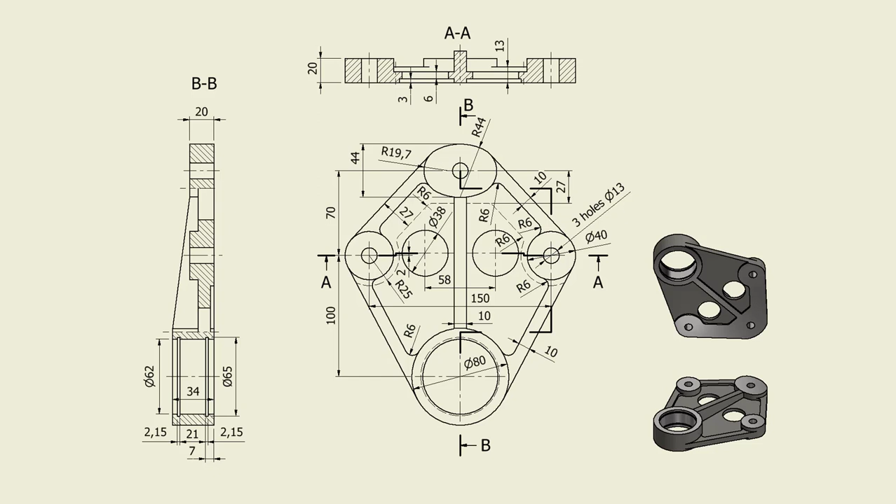Hi my friends, let's model the part number 67 from my collection of 100 parts.

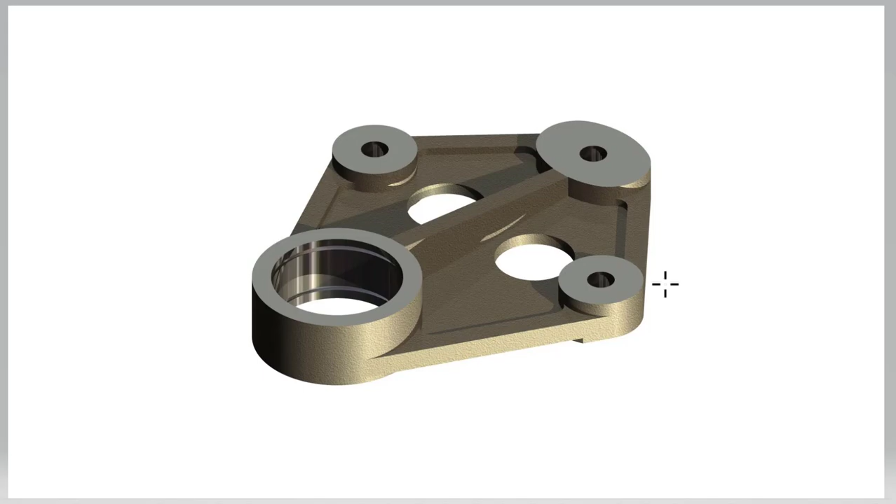The picture of this part is here. As you can see, there are three circular bosses and one oval. Yes, always we have to take care with ovals. In the drawing we see dimensions and how the part looks from top and from bottom.

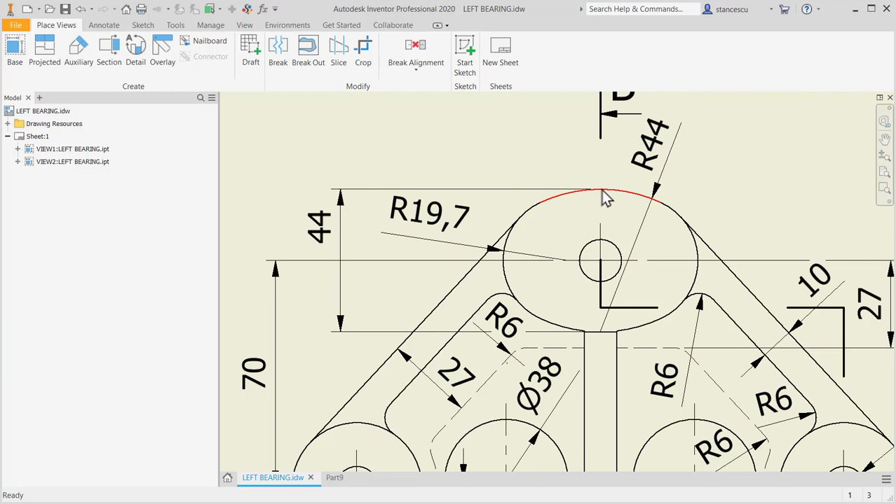About this oval, as you can see, radius is 44 on both parts and the distance is 44. What does this mean? It means that the center of one arc is on the opposite arc. There is no mention about the distance in the other direction. So we have to create these two arcs and then place the tangent circle with this radius. The other dimensions are here.

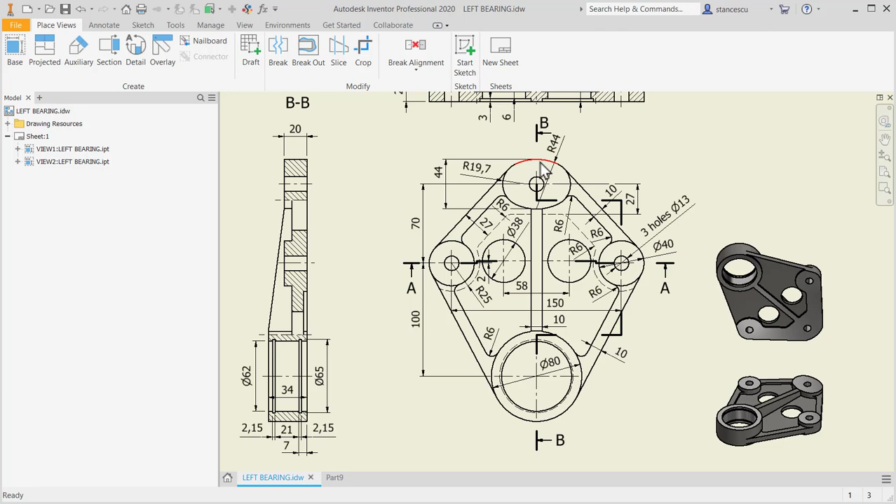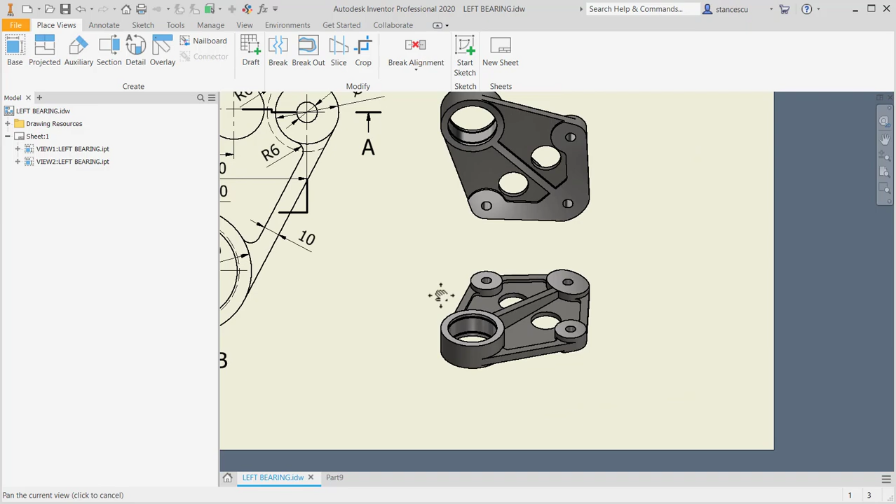We start with diameter of 80, two circles of 40 at a distance of 150, and then the oval. Yes, we start from this position. The start plane is this, and we extrude on 6. This is 6. And there is another extrusion on the back and another on the top. Let's start. Remember dimensions.

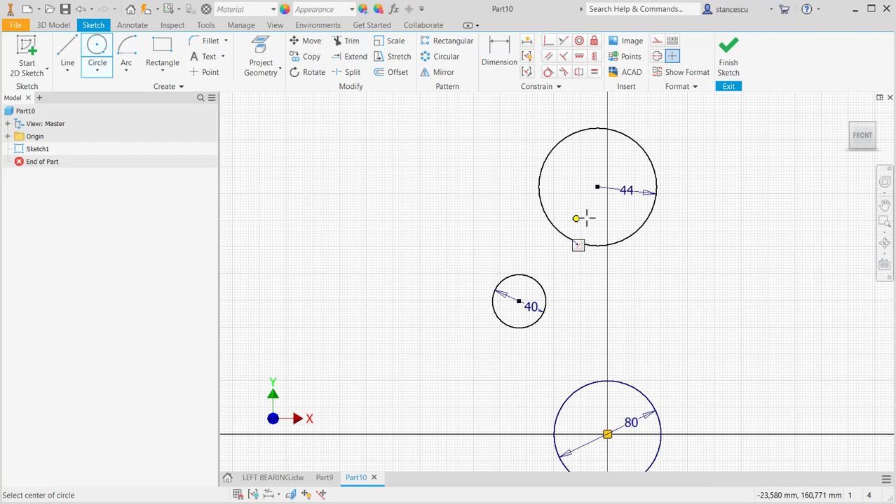We draw a circle with diameter of 80 and then another one of 40, and the oval. The oval is with the radius of 44, and another circle is placed here with the same radius. So I'll make it equal with this one. Okay, they have the centers on the same vertical, and both on the same vertical with the center point. Okay, good.

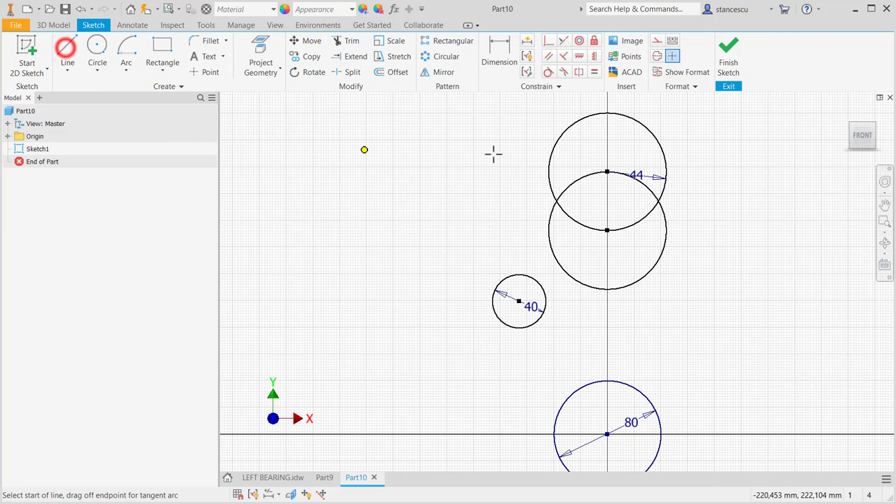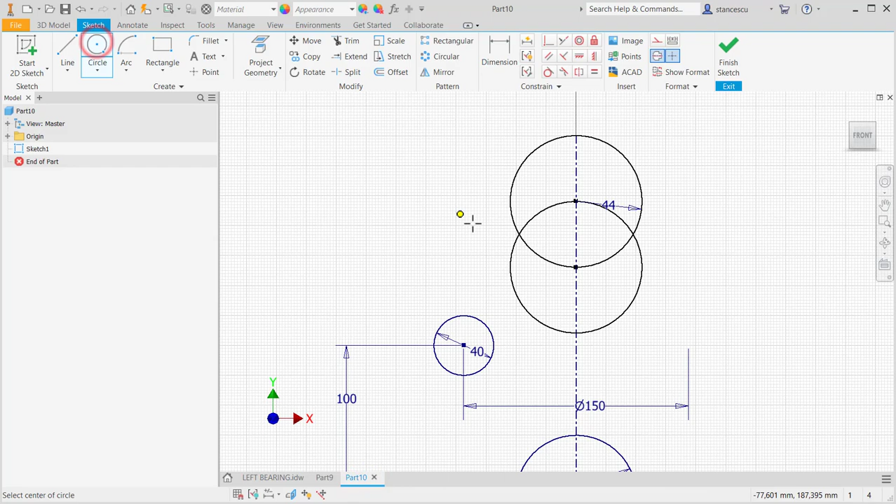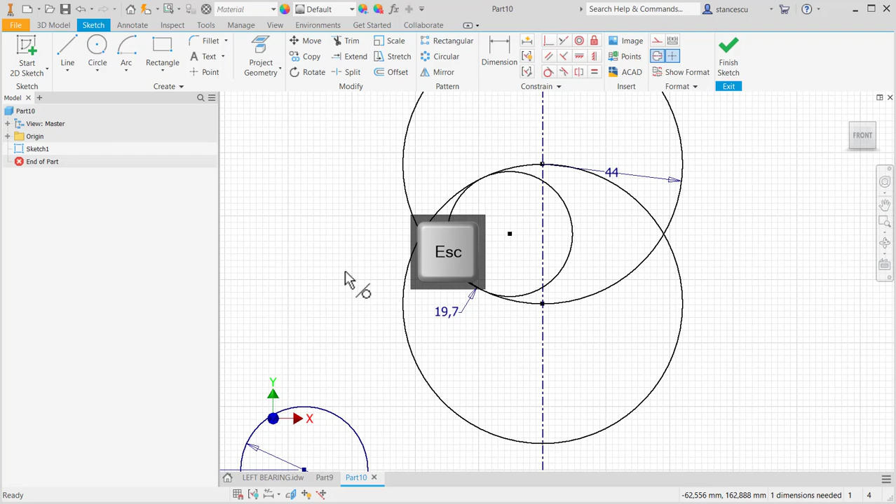The other arc of the oval is with radius 19.7 and it is tangent to those circles. I create a circle with a radius of 19.7 and I apply tangent to both circles. Good. Parts of the oval are here. Place this dimension of 70. You see, fully constrained.

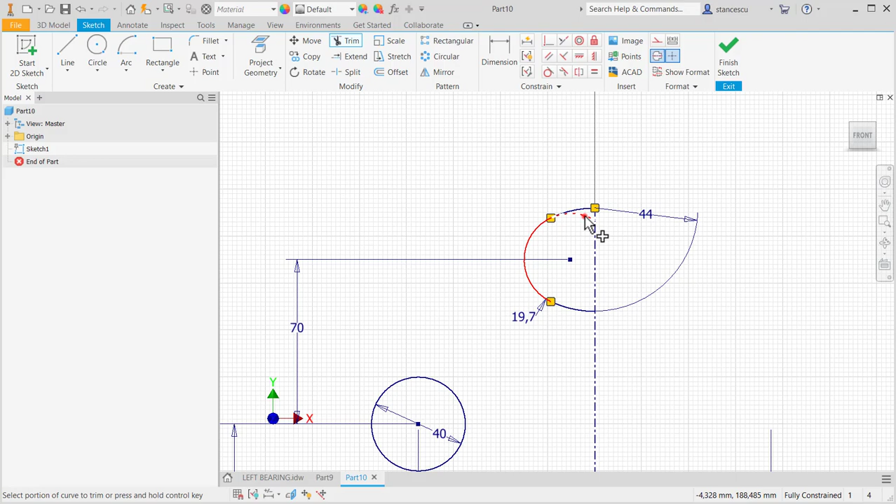And I apply trim, look at me, to all the entities to the right of the center line, and also here. Nothing is lost, fully constrained is maintained, and now I try to eliminate some other not useful ends, looking to stay fully constrained. Okay. Good. And this one, and this one, and it is fully constrained.

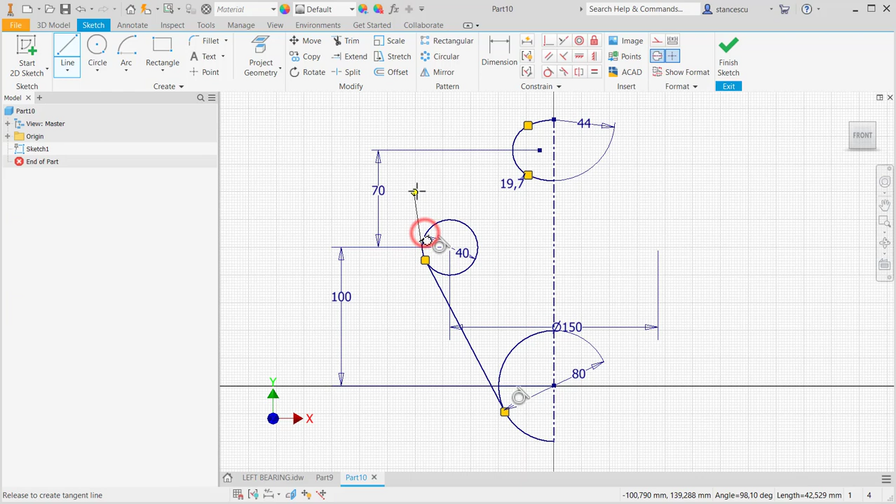Good. Now I draw tangents. Keep pressed the mouse button and find the tangent. Keep pressed and find the tangent. Okay, let me see which curve has this tangent. You see, this is the curve with the tangency. The other tangency is between these two. So the radius 19.7 is with tangency. Good.

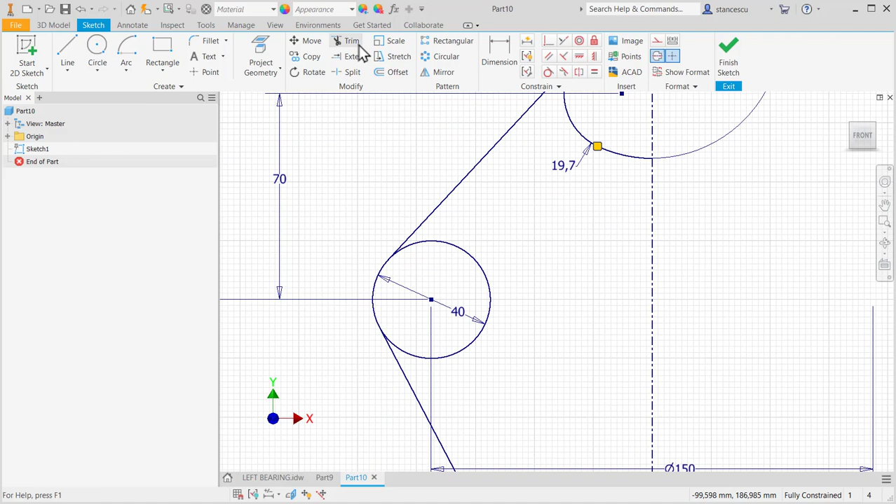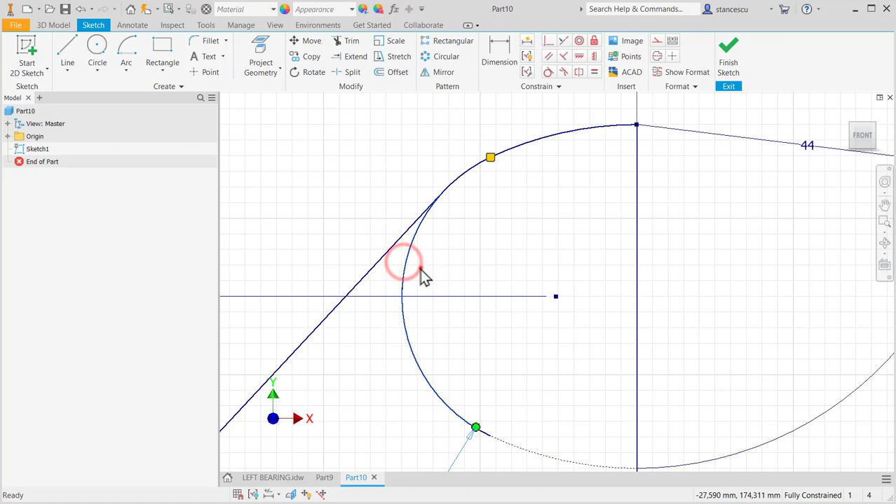Trim to this, trim here, and make this not center line. Everything is conserved. Now I make this construction, and here I need to split. Fully constrained is still here. Why? To make this also construction. Okay, now I have half of the part. Finish sketch.

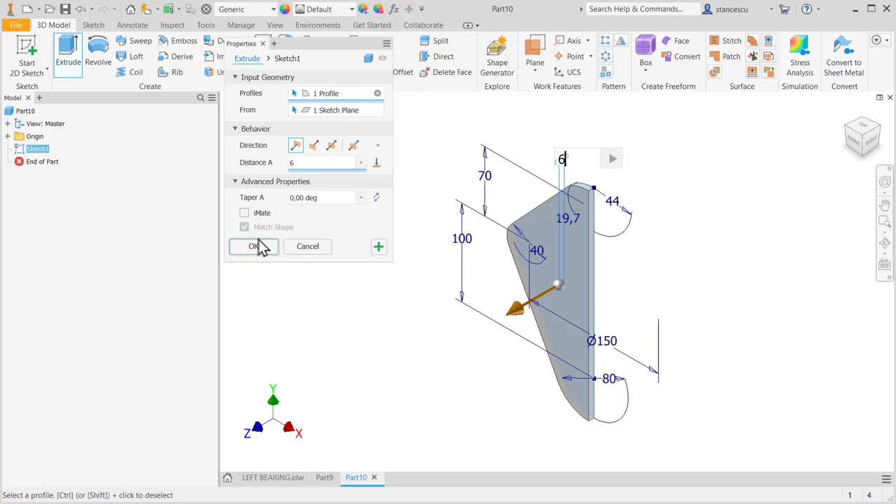F6, extrude on 6, as I said. Okay, then mirror about this plane to have the full plate. This is the plate.

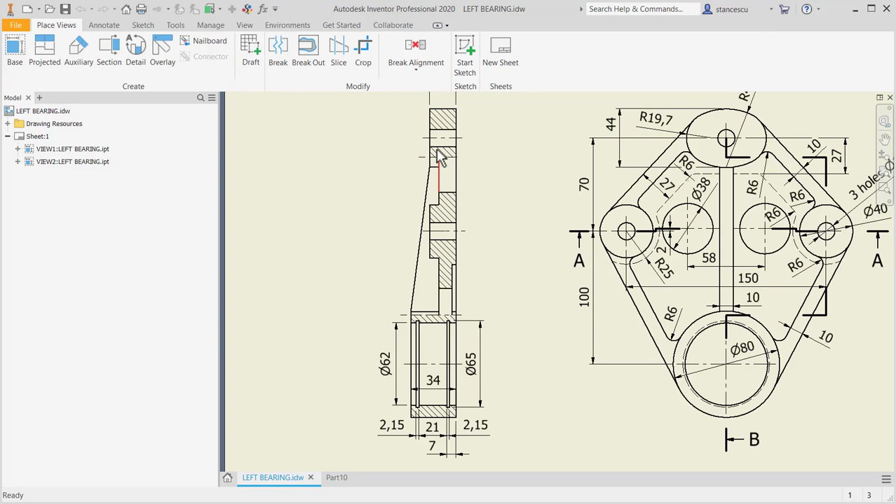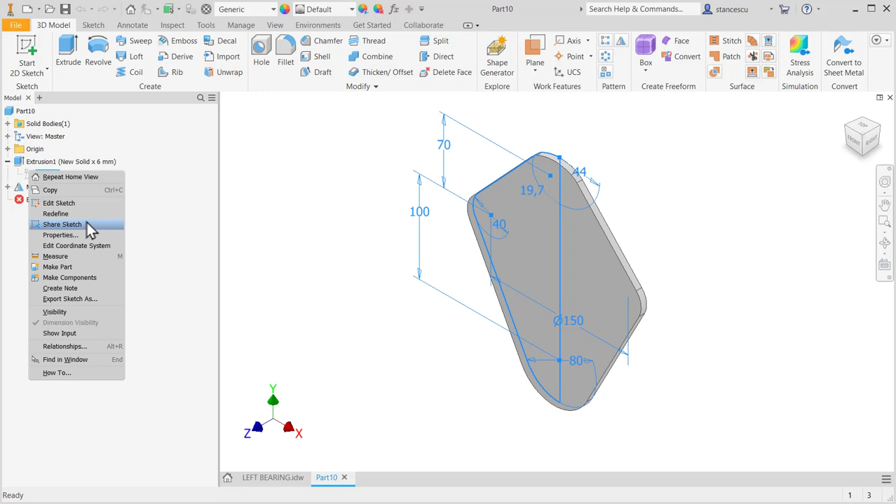Now let's take a look at the drawing. You see, there is the same level of 20 for these 3. Which ones? 1, 2, 3. And the other one is of 34. So I create these 3 bosses. It is not very difficult, but I need to have the sketch present. Sketch, share. Good.

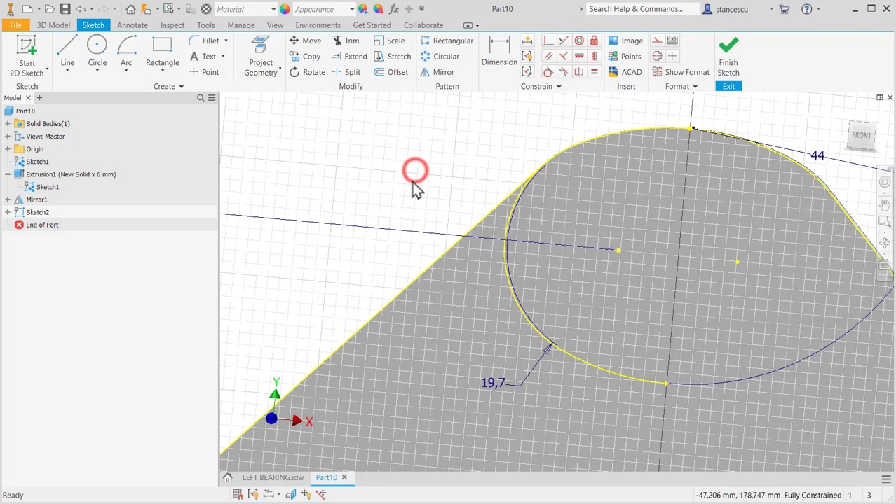I create a sketch on this face, and then I project this entity and the other one, all of them. Okay. I make these normal lines, and I extend with my hands these arcs.

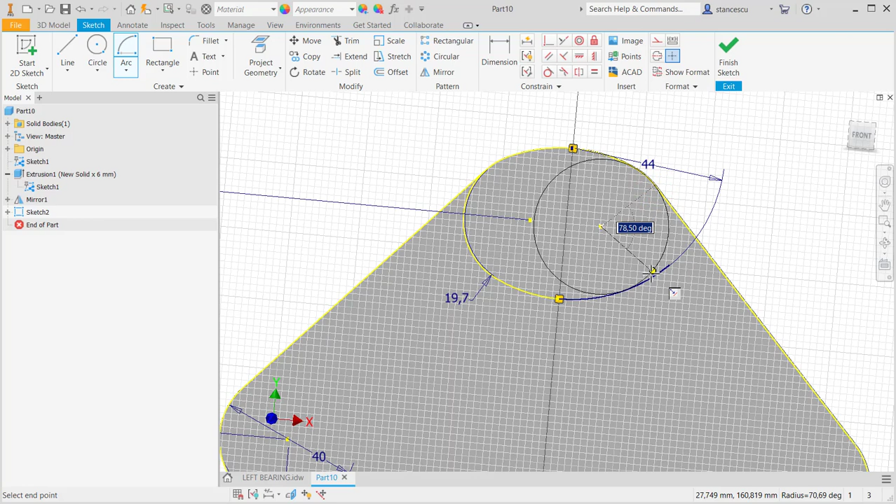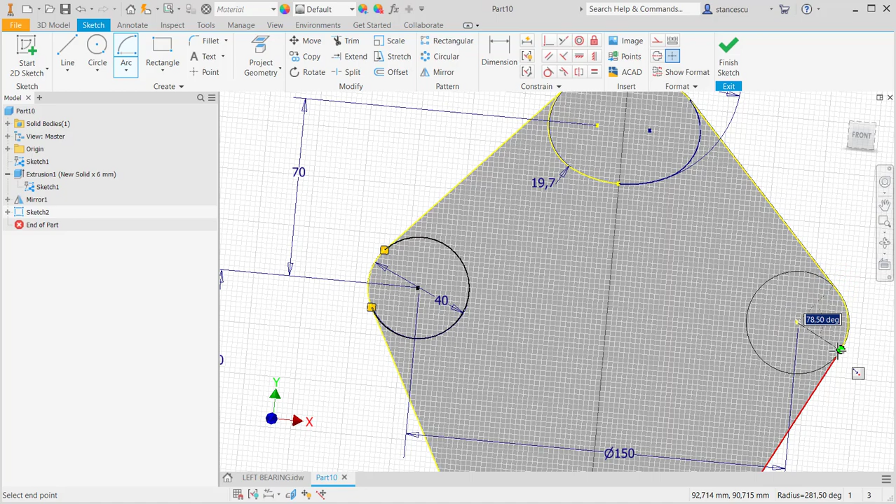Because I want to obtain the extend to here and trim this. I want to obtain that oval, to create the boss arc, this center from this point to this point, the other arc and the last one, but this is not to be extruded. Yes, good.

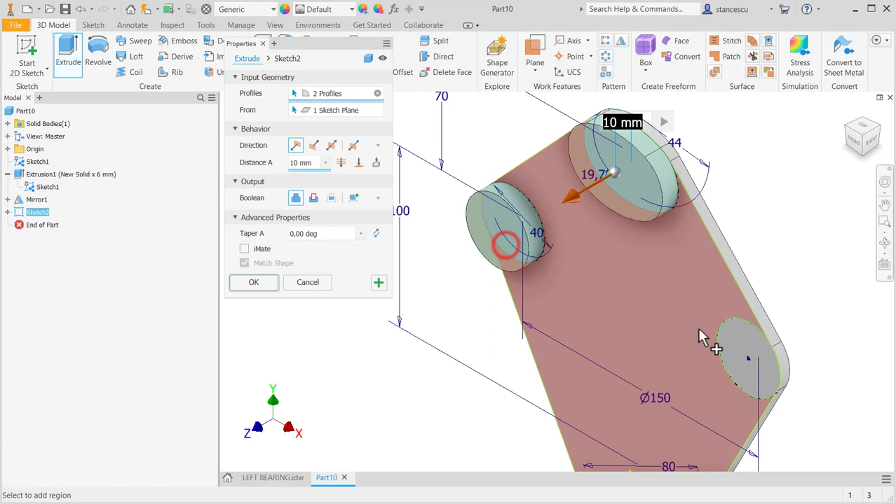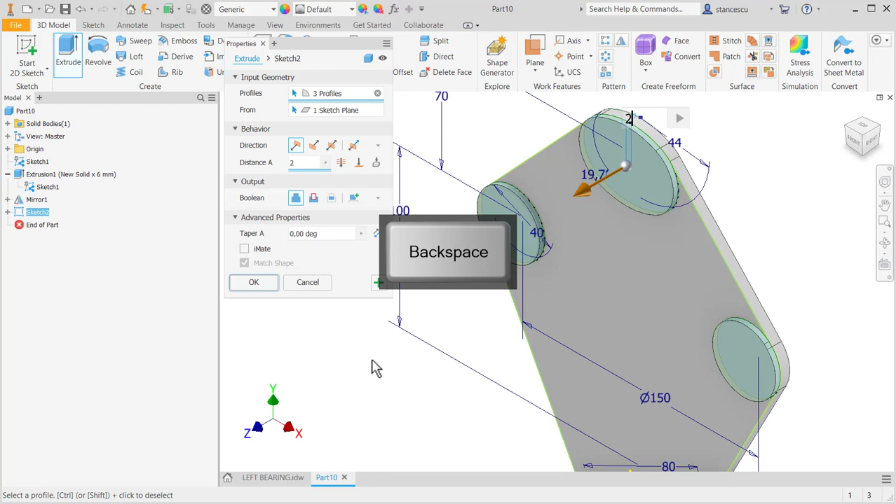Extrude this, this and this. What is the thickness? The thickness is 20 minus 6. I told you that this is the base plane. 20 minus 6. Okay. Now I create the other boss, which will have a large hole inside.

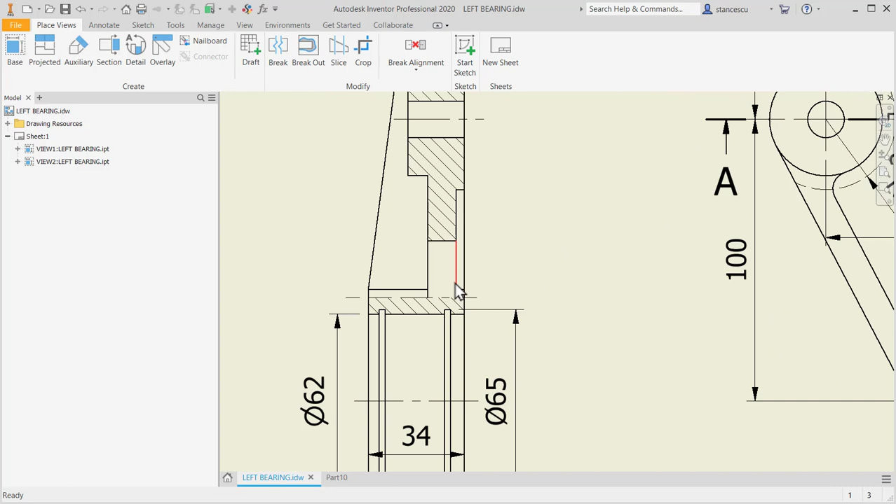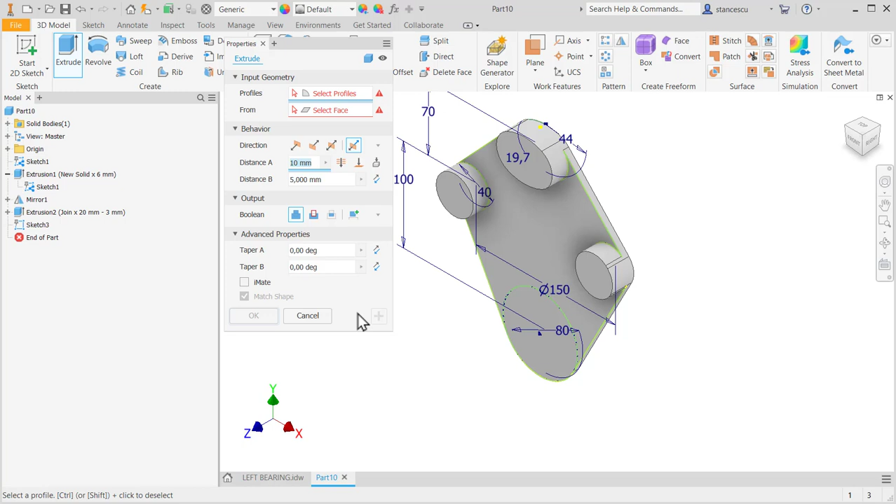Finish sketch. What is the thickness? 34 minus 3. But I can extend it with 34 minus 3 to the left and 3 to the right. Yes, let's do it. Extrude. Asymmetrical. Of this contour, which is to both parts, measured from here.

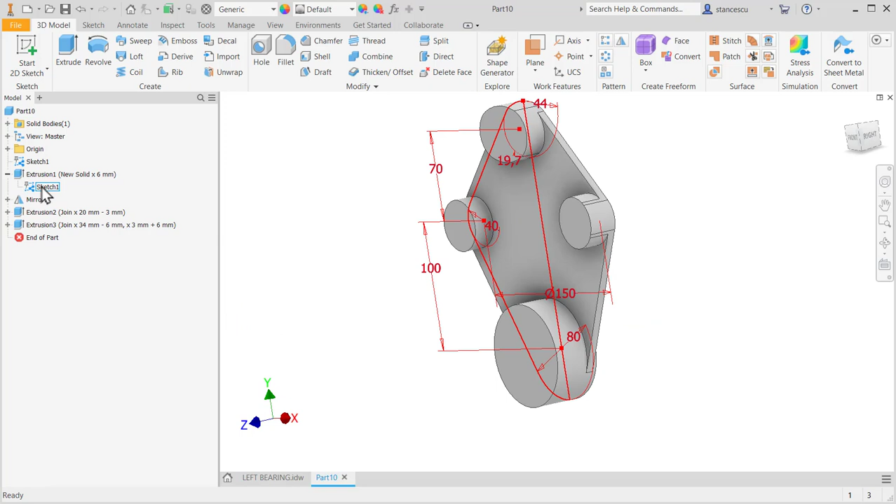Yes, so this is 6, don't forget. This one is 34 minus 6, and the other one is 3 plus 6. Okay, let's make this not visible first, and then let's measure. I press M, from measure, and I measure this distance, 37.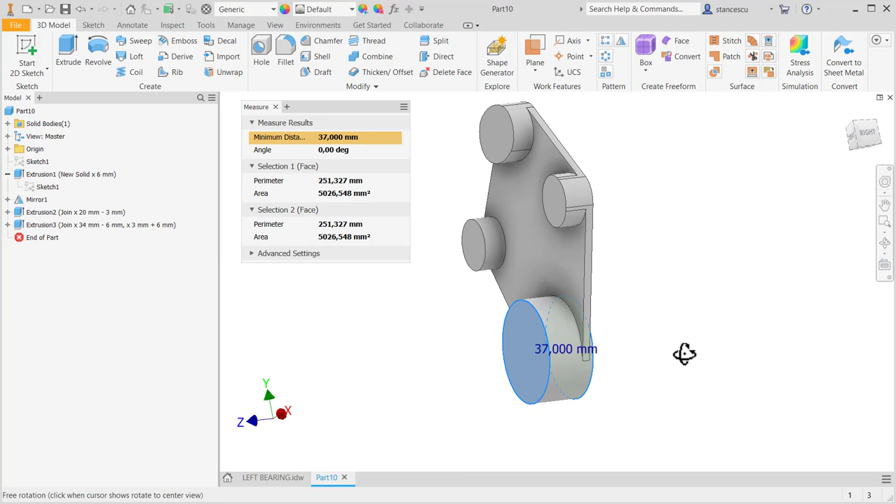I made a mistake. Let's correct the mistake. This is 3. This is okay, but the other is not okay. 34 minus 6 minus 3. Yes, because 34 is from face to face, so I add here minus 3. Good. Now M to measure again, and we have 34. Good. Escape. F7.

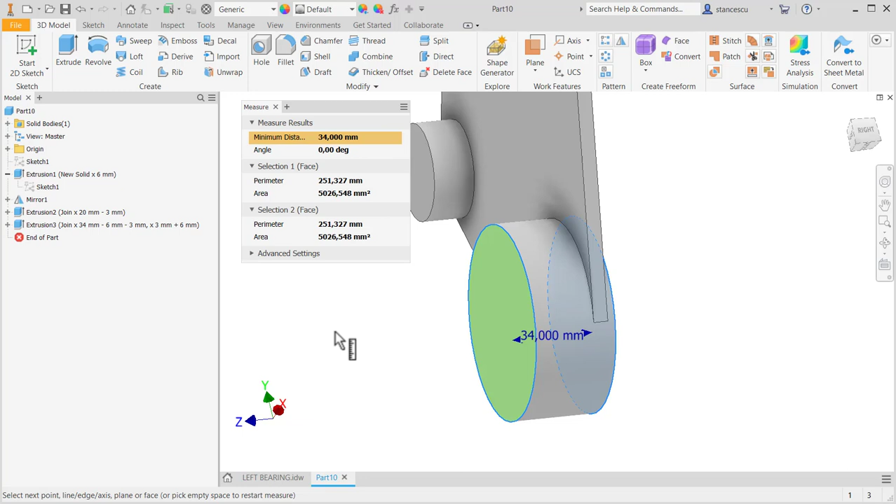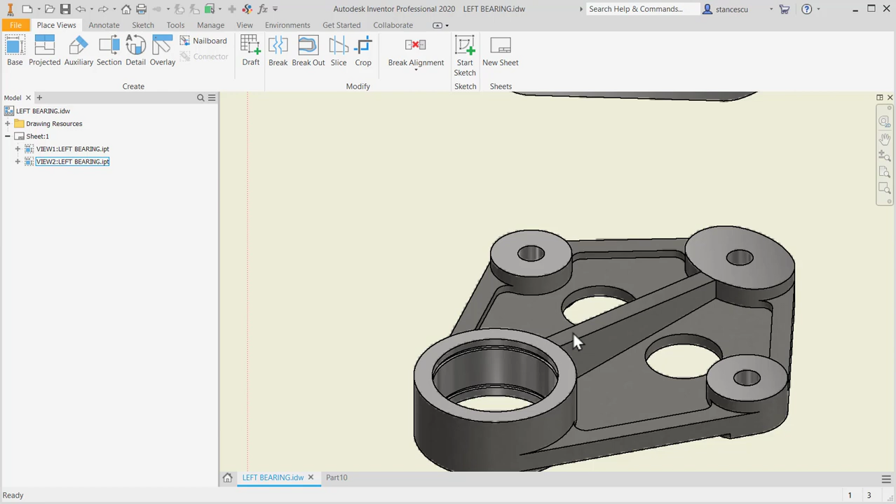We continue with this frame, this contour, which has the same width, which is 10, without fillets. We'll add the fillets because these are the same altitude. As you can see, this is sloped. This is to be made after. Good. 10 all over and parallel with the sides. This is the face.

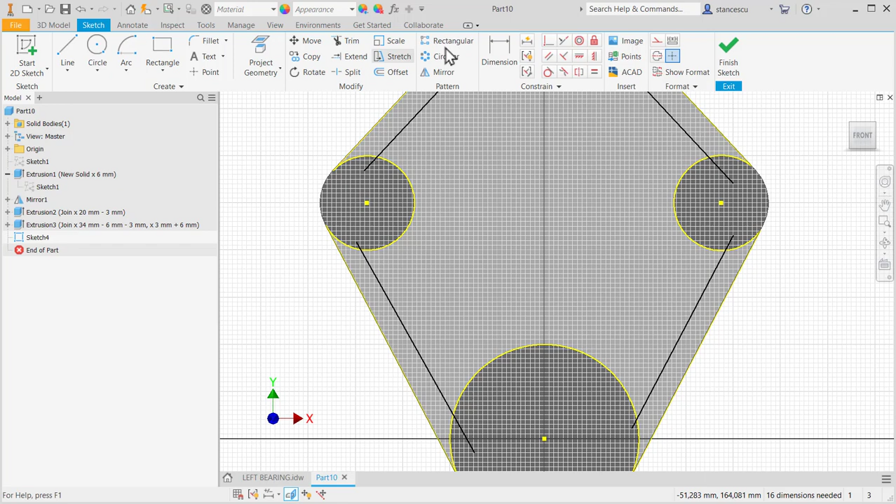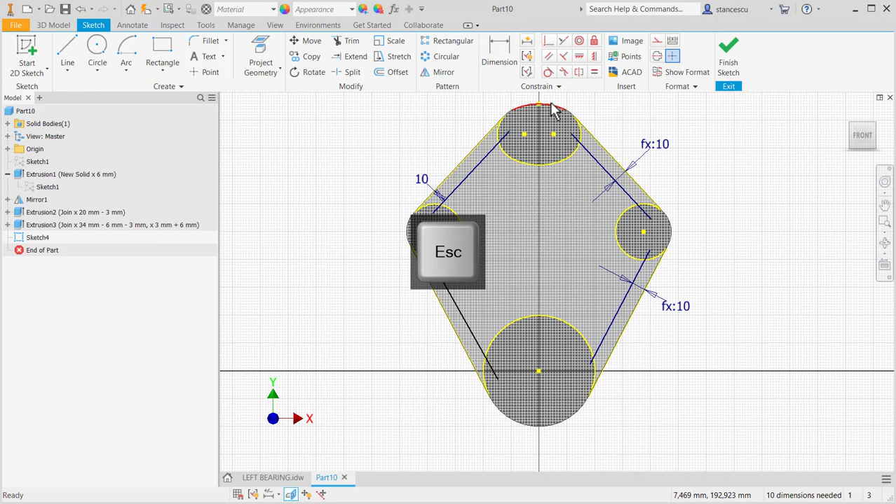F7, and now we draw some parallel lines. 1, restart. 2, restart. 3, restart. 4. I cannot apply offset because of the circles. Dimensions 10. And then I take them as reference. This is not parallel. Then trim.

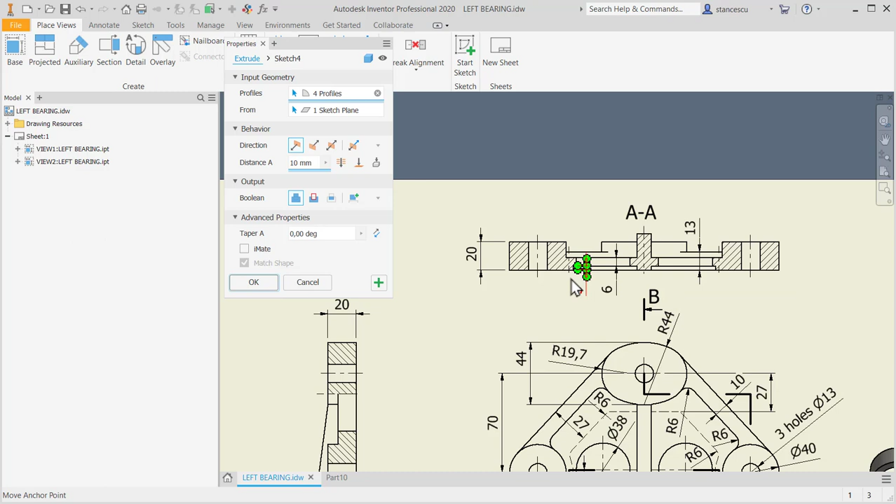Finish sketch. Extrude. All the 4. What is the thickness? The thickness is 13 minus 3. 13 minus 3. All the same level.

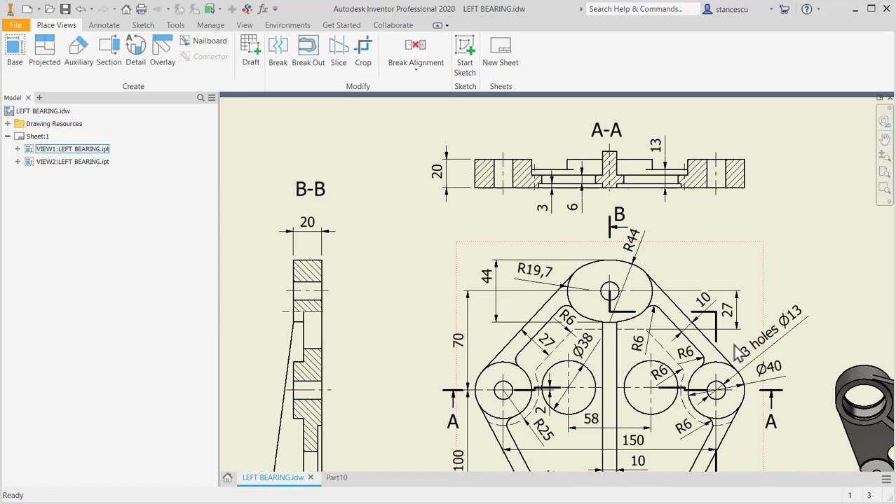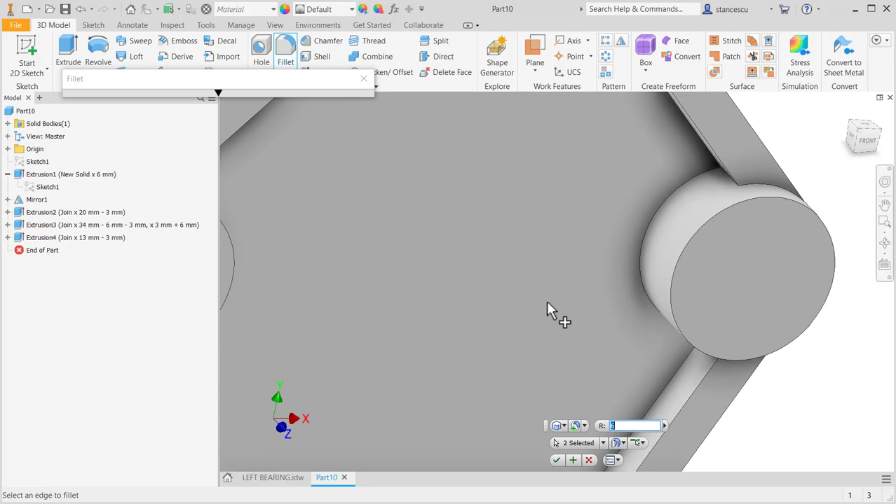Now fillets of 6 all over. Yes, 6 is the dimension. 6. You have to be patient and apply all the features to have a good result and to be professional, of course.

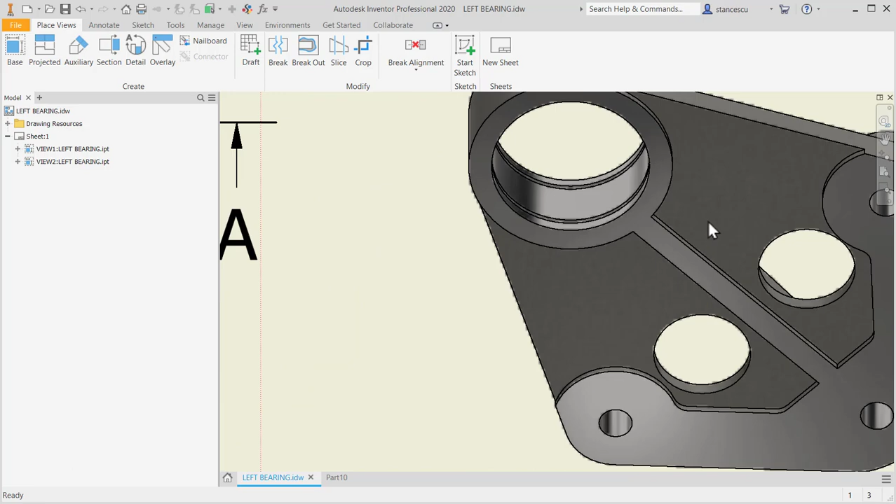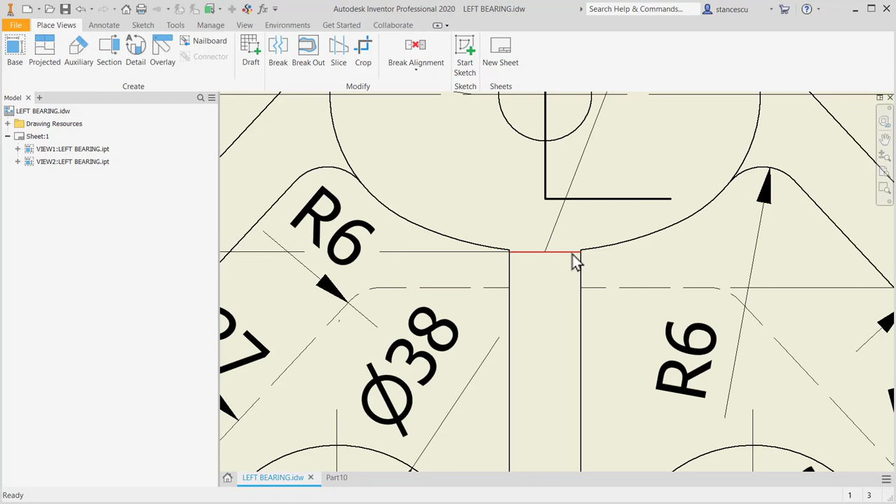Okay, let's see what about that middle sloped rib. Yes, on this face is at the same level of 3. Yes, the 3 millimeters, you know, and the other face is sloped between these two bosses. Yes, we can see something here. This is the end of the sloped rib, and this is the other.

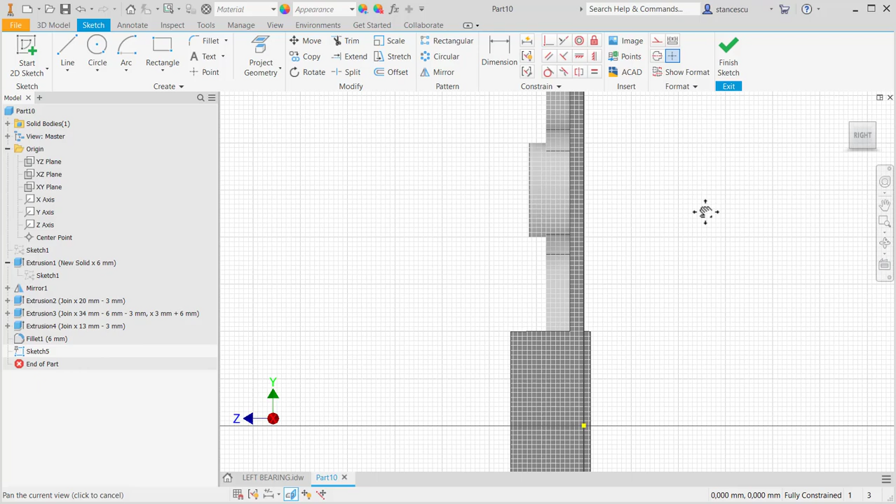What is this? This is for us to understand that this is tangent here in the middle, and then is flat at the same level with the boss. How to solve this? Well, we create a sketch in this plane, F7. The sketch is based on, I project here geometry, but all this face.

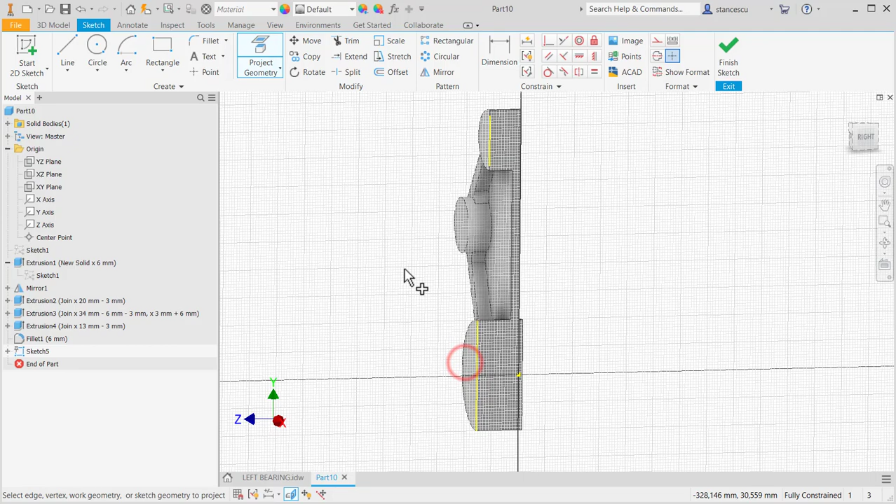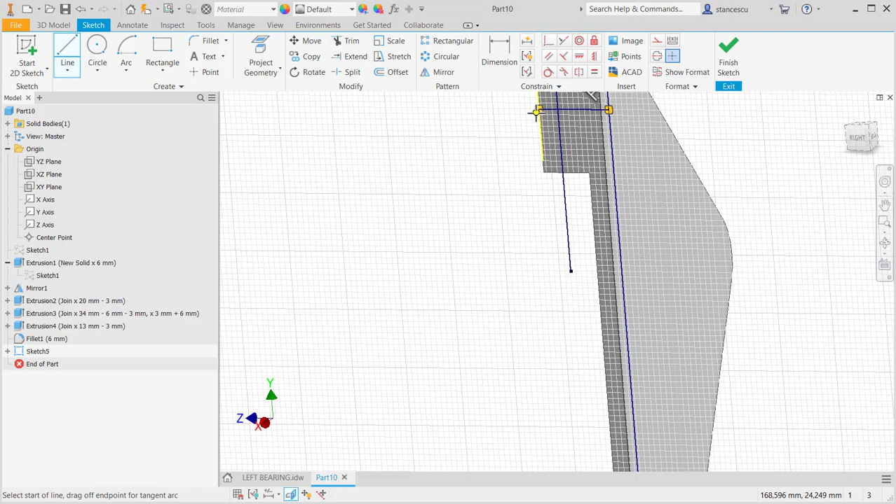And now I also project this face. I can draw lines to create a close contour. This is at 3 millimeters, of course, and another line from the midpoint of this perpendicular to this. Then another line from here to the corner, the sloped one to the other corner, and then from here to the midpoint, the last is this.

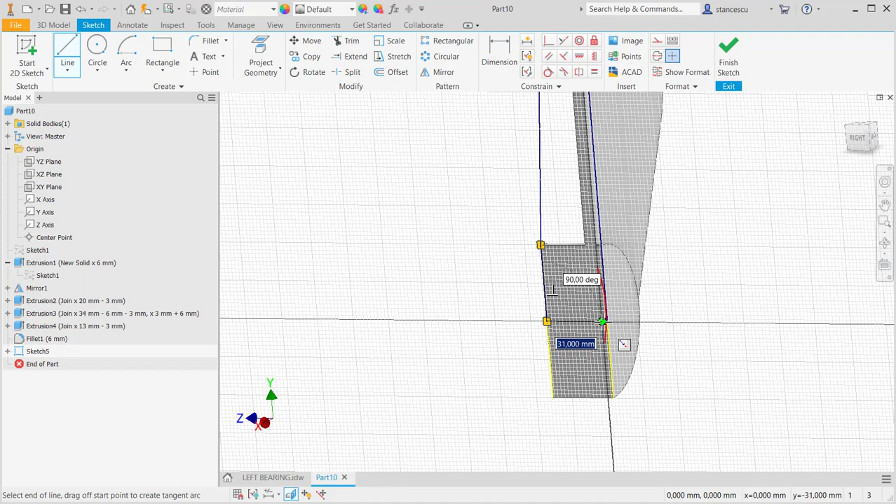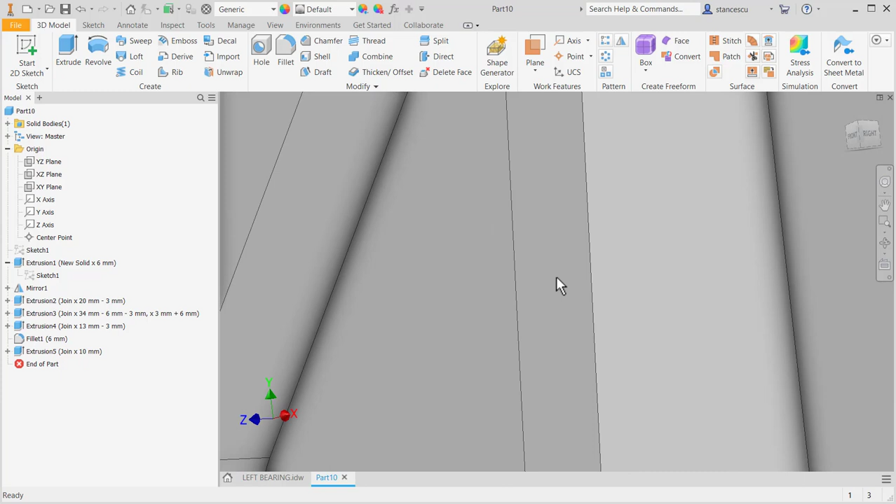Yes, we have a contour. We have to trim the unneeded end, finish sketch, and extrude. What is the extrusion? 10 millimeters, symmetrical about this plane. Extrude, 10 is already selected, but symmetrical. Okay, now you can see that particularity to be at the same level.

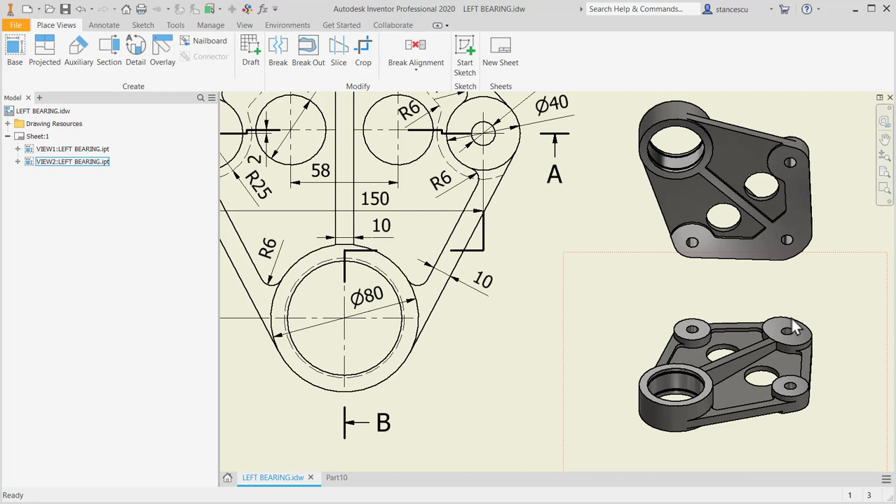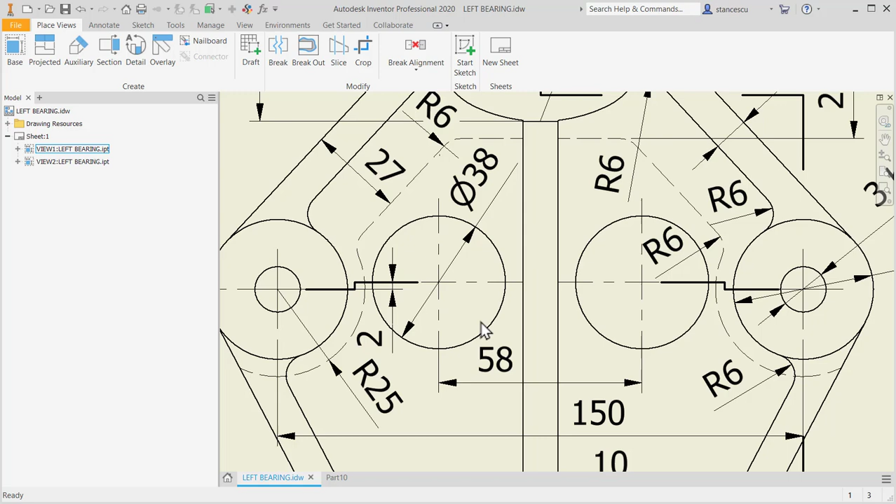Good. Now let's deal with the back. On the back there is a straight line under the oval. Good. What are dimensions? Dimensions are of these dotted lines. Yes. 27 symmetrical, 25 is the radius, and 27 in the oval zone. Radius 6 after we create the extrusion. And also behind this circle we have to create that extrusion. Good.

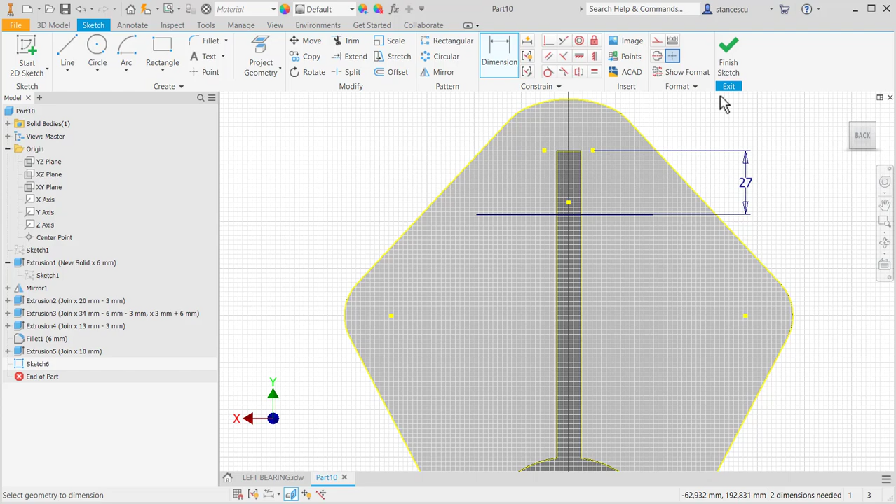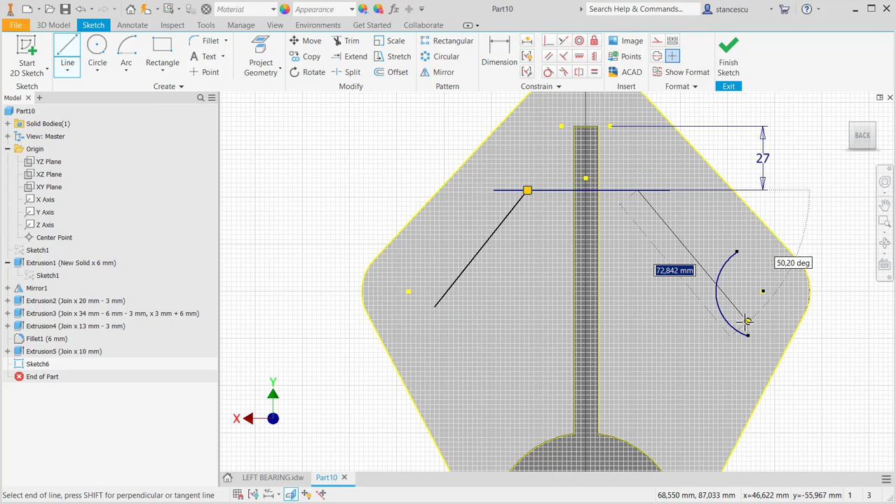We create all on this face. We have to draw a horizontal line placed at a distance of 27 from the middle of the oval. 27. Then other one, then another line like this, restart, another line like this. They must be parallel to the sides and at a distance of also 27 taken from here.

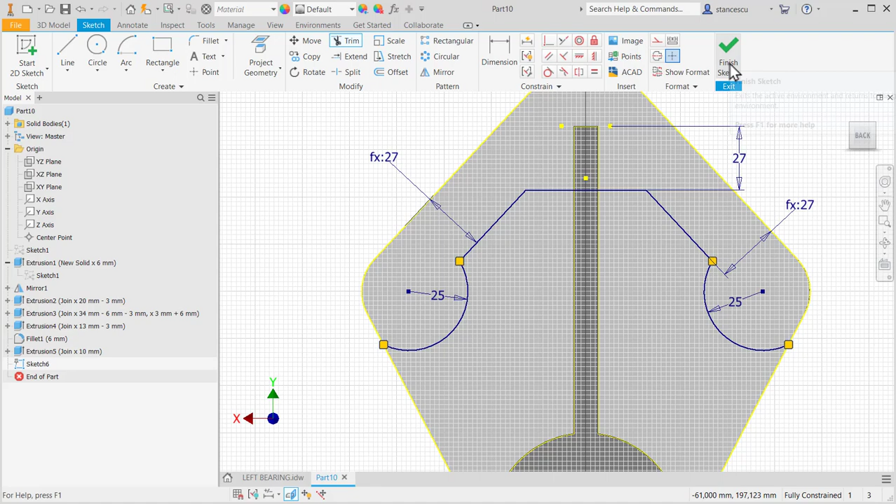When somebody changes this, now a circle. A circle with a radius of 25. 25. Trim. And that's all. Finish sketch, extrude this area on 3 millimeters. Okay.

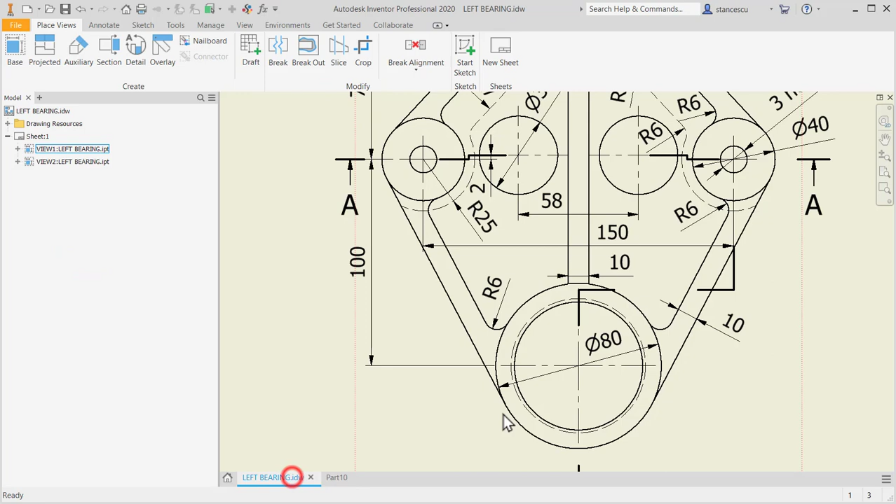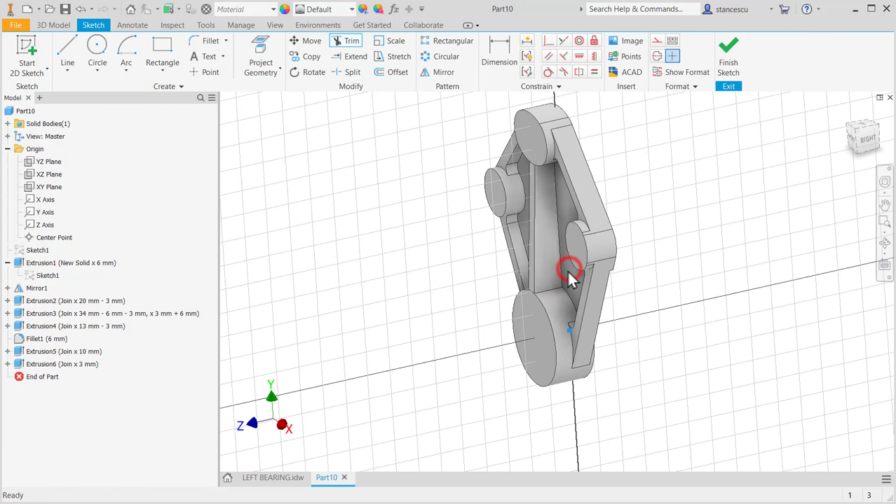We apply now this hole with channels, as you can see here. Yes, we create a close contour and revolve about this axis. Dimensions are 62, 65, 2.15 for the dimension of channel. They are symmetrical. We will create equal elements before placing dimensions. 7 here, 21 inside. The plane is this one, F7,

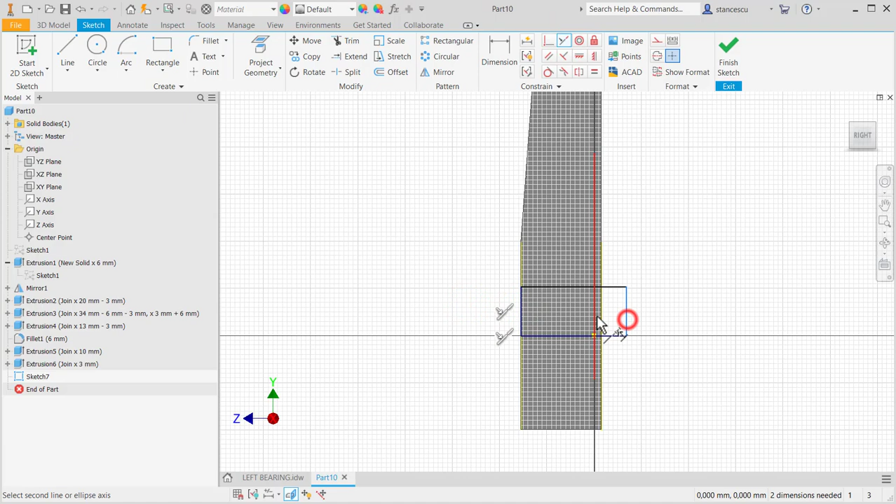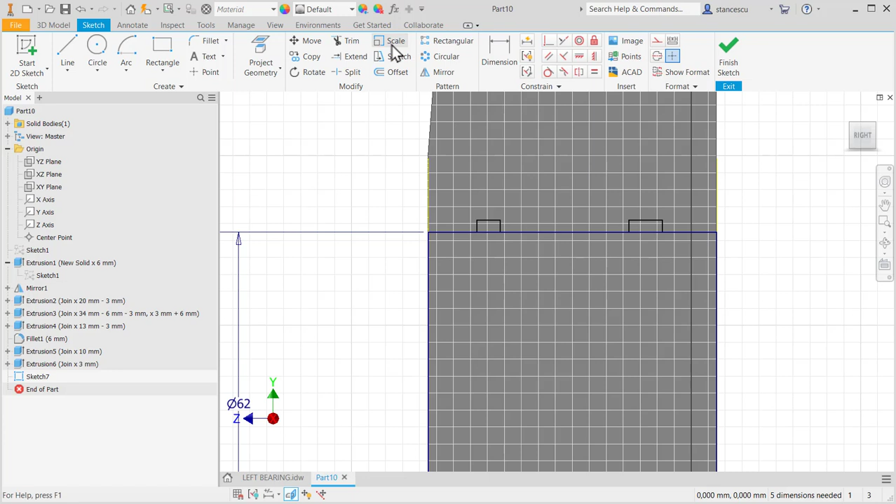and we create a rectangle which must contain the center point. Yes. Good. And apply center line. This diameter is 62. There are 2 rectangles, and trim, or split is better. Split to make them construction inside, construction, and equal.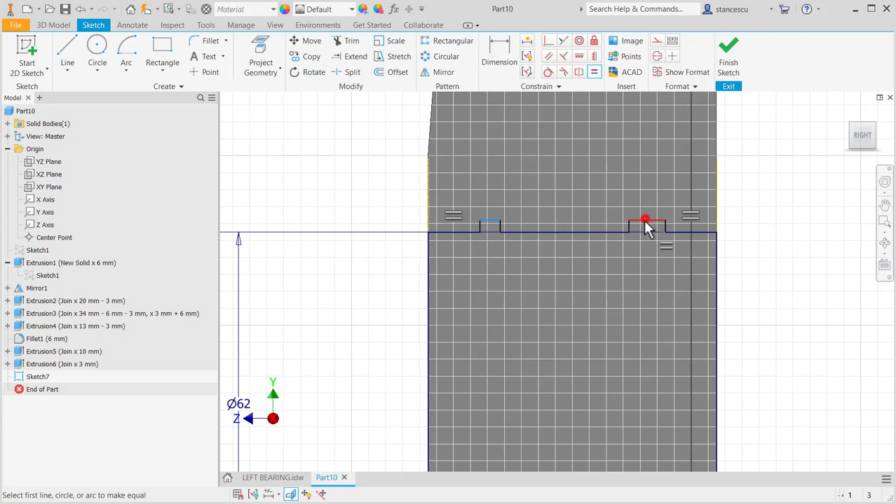This is equal with this, and same are these two. If I place a dimension of 7 here, 7 will be on the other side, and 2.15 is repeated on the left. The other dimension is the channel diameter, which is 62. Fully constrained, finish sketch, revolve, cut, OK.

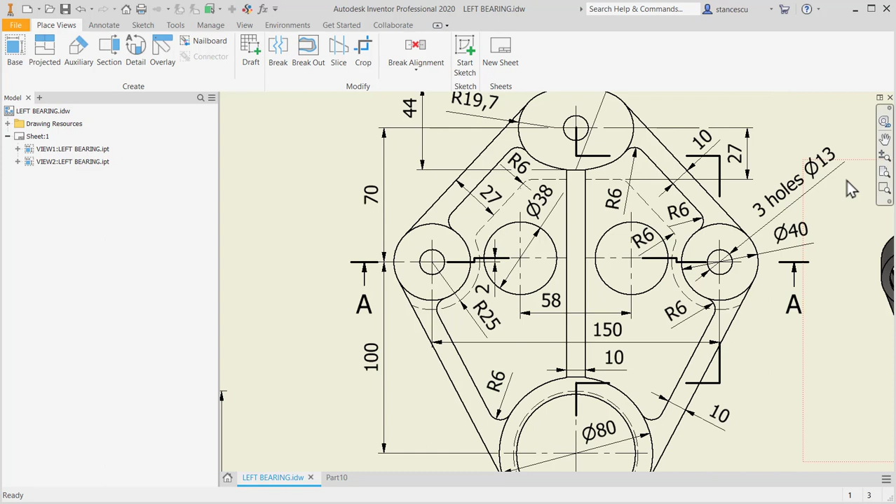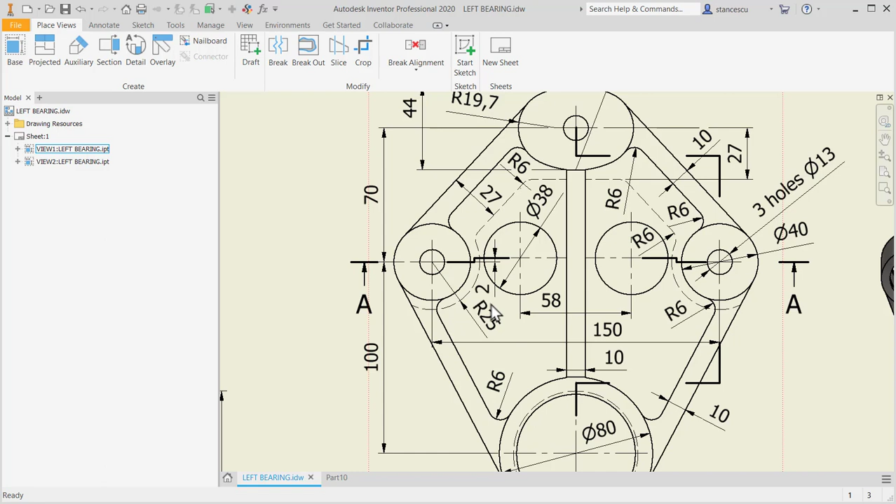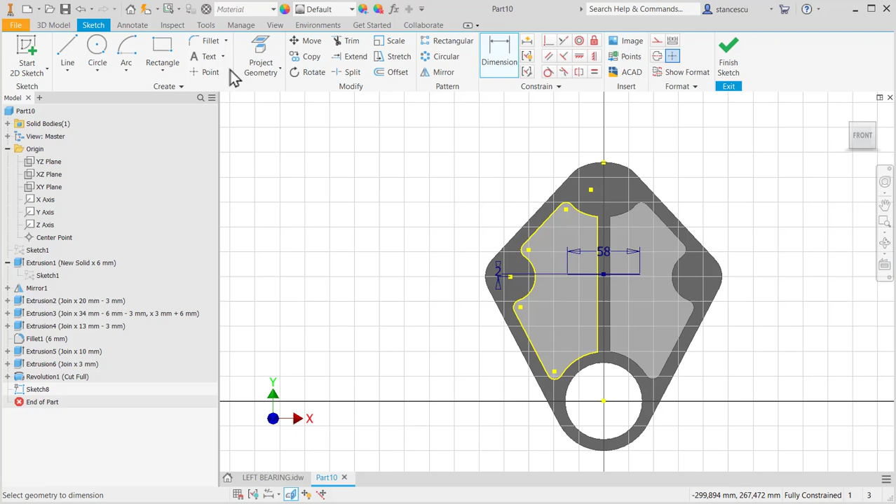Now the holes. There are 3 holes of 13 placed in the centers of the circles and oval. Other 2 are this one. Let's start with this one. Yes, 58 between them, 2 millimeters above this line, and the diameter of 38. This face, F7, a line of 58, yes. Let me apply the same vertical of the midpoint with the center point, and then 2 millimeters from this up, not down. 2. Good.

Point at the end of this line, and now hole with diameter of 38 through. Simple hole, 38. OK. Then holes at the level 20, you remember. I project also this circle and these 2 arcs. Why? To draw a line and to place points in the midpoint and centers. All of them are 13. Okay, hole 13.

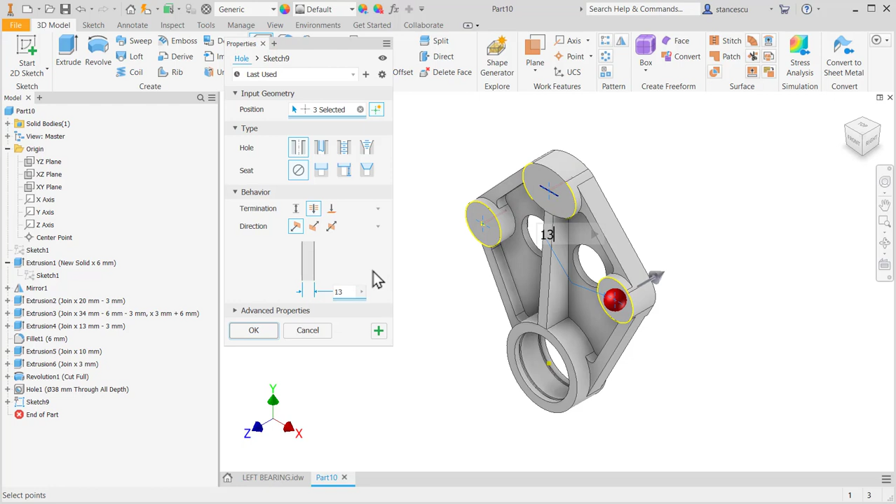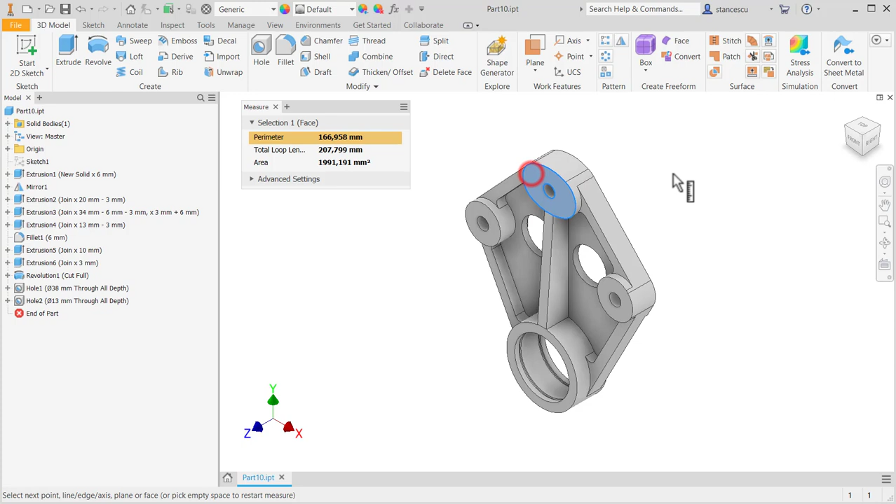Okay, there are 2 things to modify here. The first is a mistake and the other is an omission. The mistake is about this dimension, which was to be 20, yes? It is 26. Why? Because I didn't subtract this when I made this. This is very simple to repair.

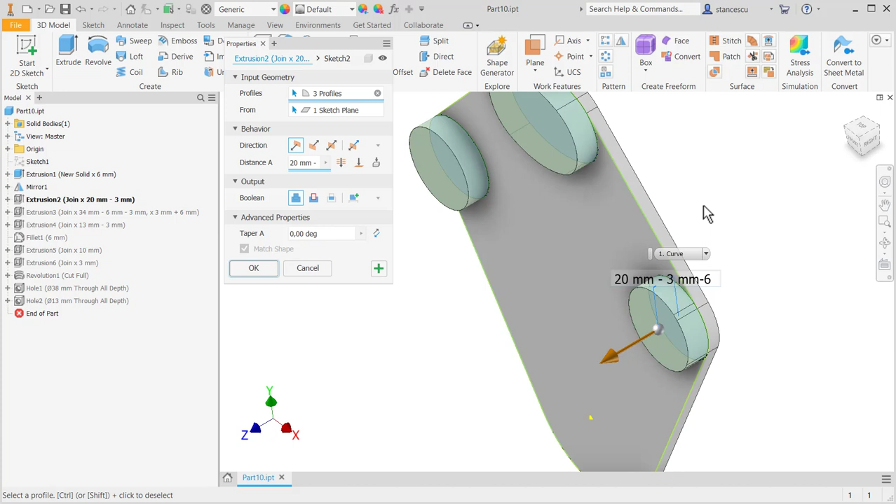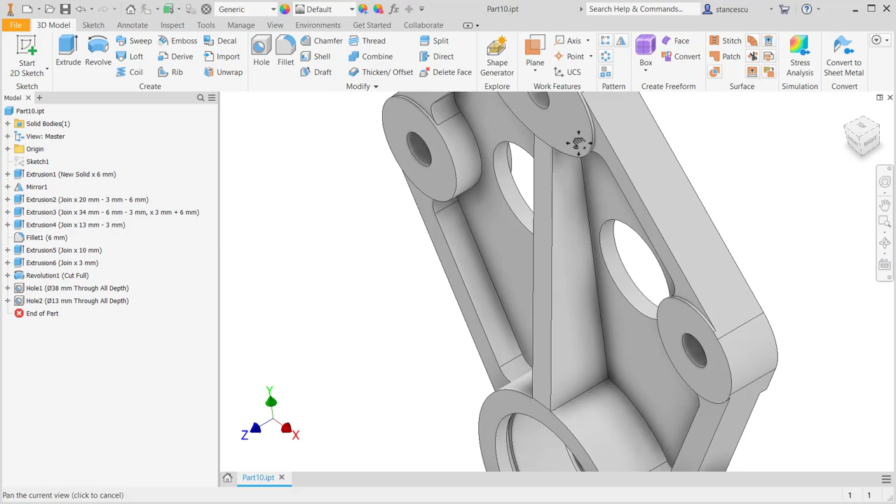We go to the extrusion of that object. Double click, and instead of 20 minus 3, I place minus 6, because we start from here, not from the back. Yes, the back is minus 3, the face is minus 6. Okay, this is the distance. You must observe that this is the same. Nothing was changed because I used faces, and faces now are modified. Everything is okay, and the dimension is of course 20. You see, 20, 20.

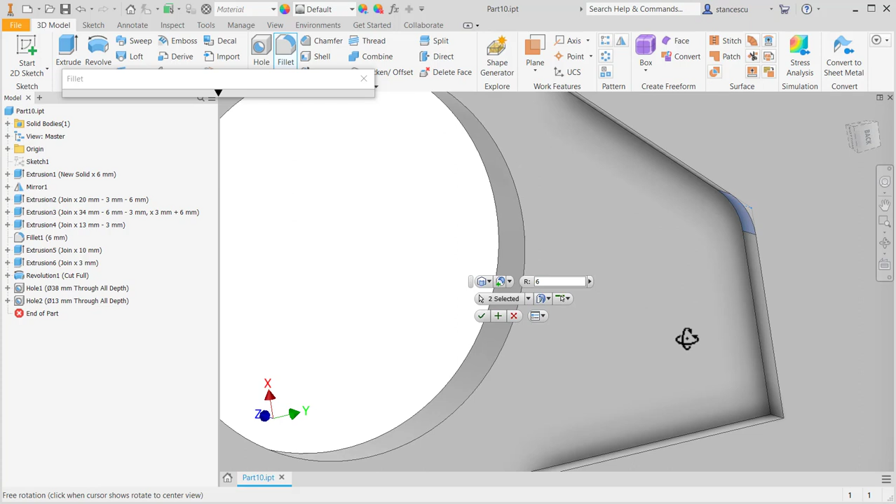The omission is radius 6 to these corners. I select a corner, 6, all of them. I mentioned this during the presentation, but I forgot.

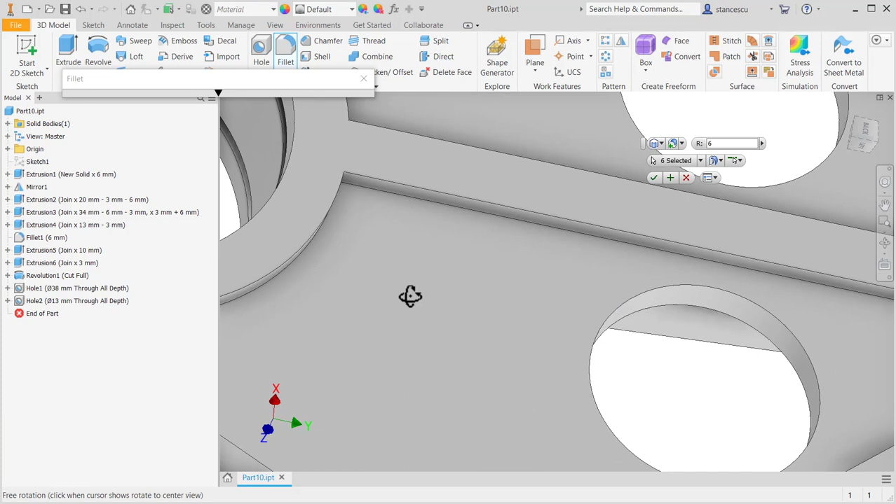I'm 75, my friends. I'm not so young. Yes, I'm not so young as you are. Okay. Okay.

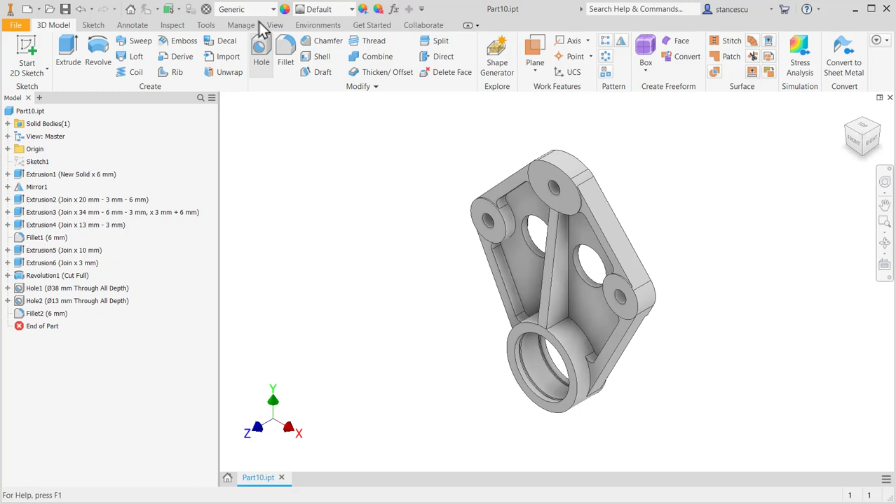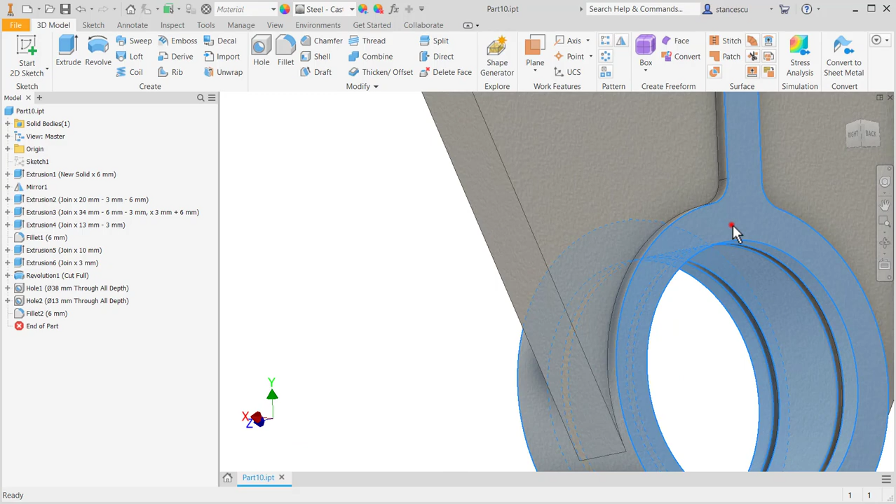Material is steel cast, general aspect is steel cast, and some faces must be machined. I think that's enough. Machined, steel polished.